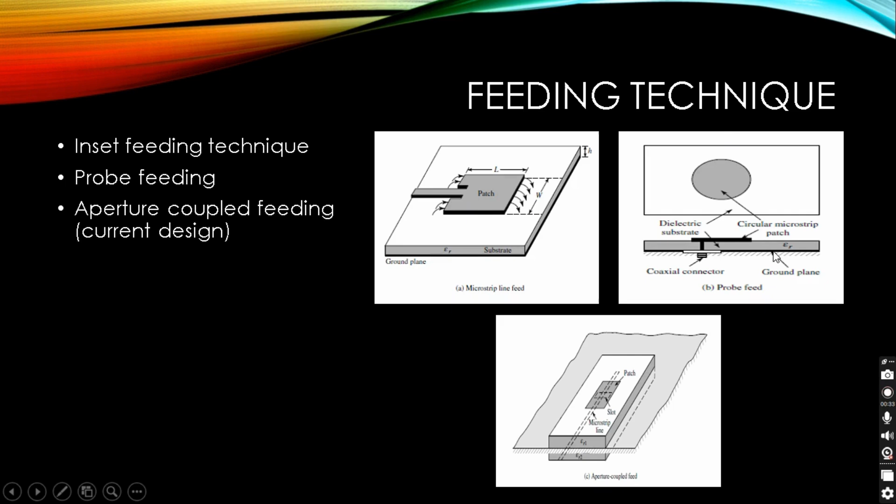Here are the various feeding techniques. The first one is an inset feeding technique. The second one is a probe feeding technique. The third one is an aperture coupled feeding technique. So what difference do they bring? Now these feeding techniques vary based on our requirement. It also defines the ease of modeling and fabrication and the required profile.

Now in an antenna, when we have designed an element, it might go into an array. The array may be linear, planar or phased array. So based on the requirement also, we choose the feeding techniques. And then comes the specification. The specifications might be stringent. I mean, we might need a very broad bandwidth, or sometimes it might be a narrow bandwidth patch antenna. And there are other antenna characteristics, such as cross pole. So, depending on the feeding technique, the cross pole might differ.

So, you can have a look at the various designs that I have demonstrated previously. The first one is the inset feed, where we have a strip line and we have an inset cutting in the patch. The second one is a coaxial probe feed, where the connector's copper conductor core will touch the patch. And here, the third one is the aperture coupled feeding technique, which we are going to see today.

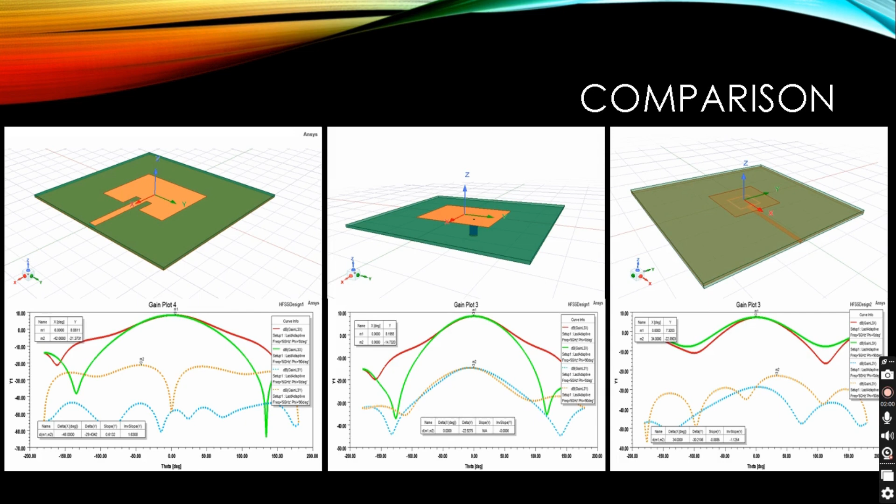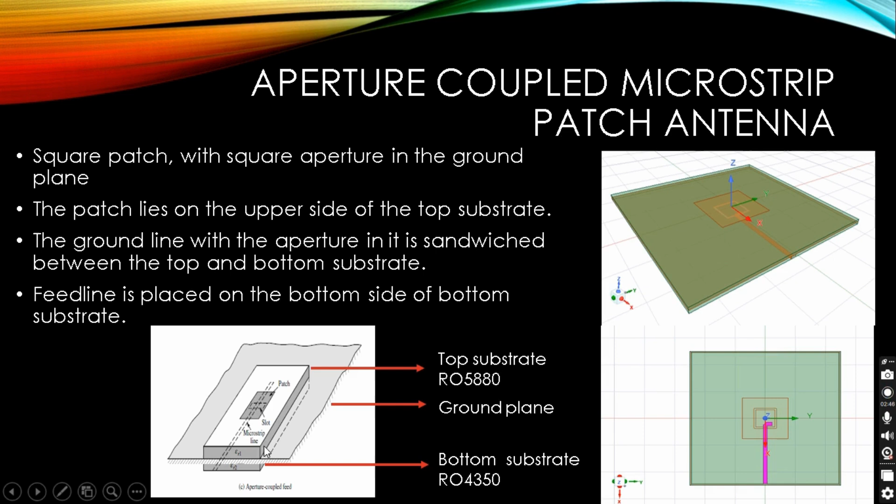So aperture coupled microstrip patch antenna, what is it? So today what we are going to design is a square patch, and it will have a square aperture in the ground plane. The design is unique in itself because here the ground plane will be sandwiched between two substrates. Like in this diagram you can see we have a top substrate and then we have a bottom substrate, and then the ground plane will be sandwiched in between these two, and in this ground we'll be having a slot or an aperture, square aperture, that will couple the RF signal from the feed line to the square patch.

Here is the basic calculation as done in the previous videos. In this video as well, we'll be designing a patch antenna which works at 5 GHz. So the free space wavelength will be 0.06 meter, and the guided wavelength, because I'm using Rogers 5880 material, will be 40 mm. The patch length typically we start designing from lambda g by 2, 20 mm, but we'll analyze the design and see at what length the exact results are coming.

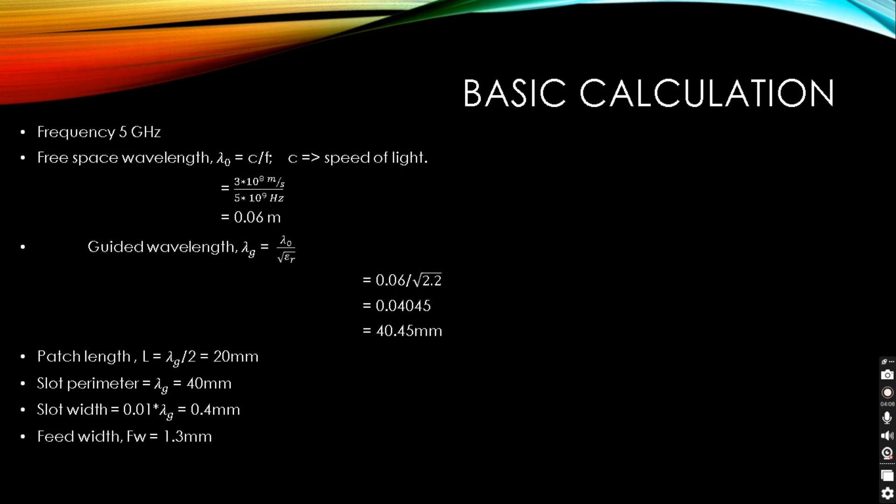The slot perimeter is around lambda g, and the slot width will be 0.01 lambda g, it is 0.4 mm, and the feed width is 1.3 mm. That is based on microstrip line calculation, microstrip of 50 ohm, depending on the substrate that we are using. Because we are using here 4350 material that has an epsilon r of 3.66. If we use the line calculator, 1.3 mm feed width will give us 50 ohm impedance. So let's get started with the design.

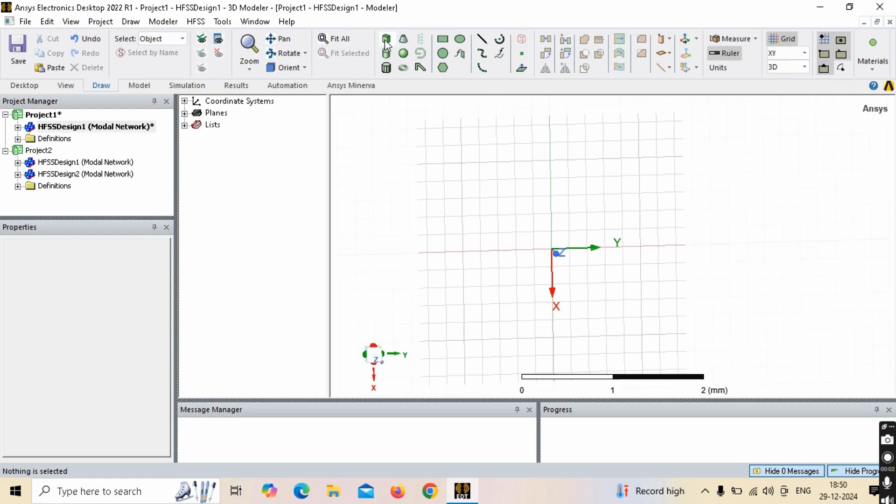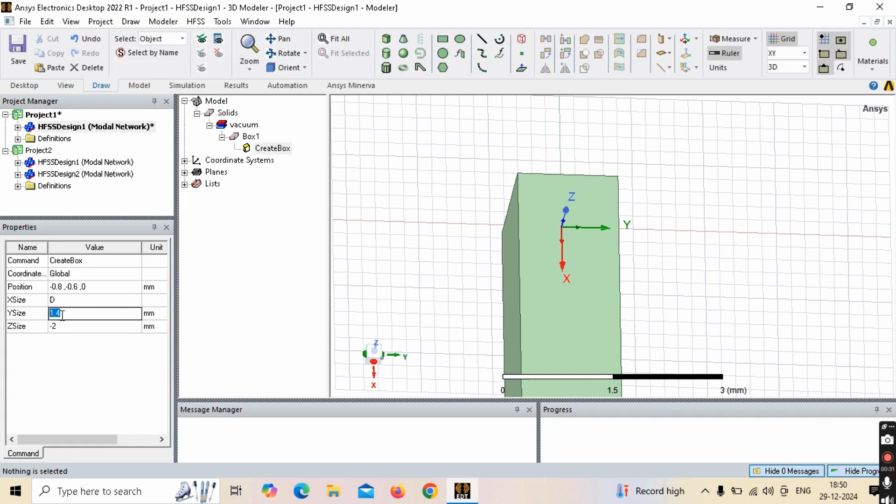This is the working plane in HFSS. We'll first design the antenna in HFSS and then do it in CST and compare the results. Let's draw the substrate first. We'll click on this draw box and drag our mouse. And then click on create box. Here we'll define our dimensions. Along X, I'll define D, take it to 50 mm. Similarly, along Y axis, I'll define it as D. And Z, my substrate thickness is 0.76 mm.

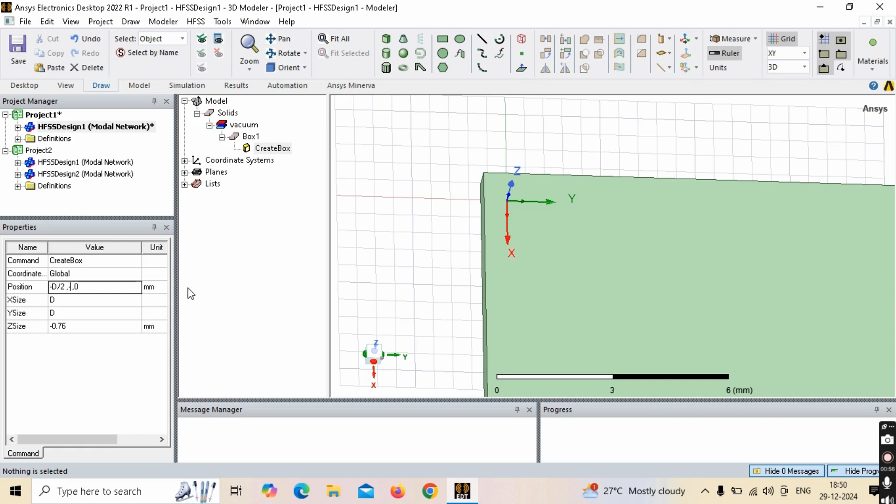And then position at the center. So along X, it should be minus D by 2. Similarly, along Y axis, it should be minus D by 2, and Z should be 0. So this is the substrate. My square patch will sit on top of this.

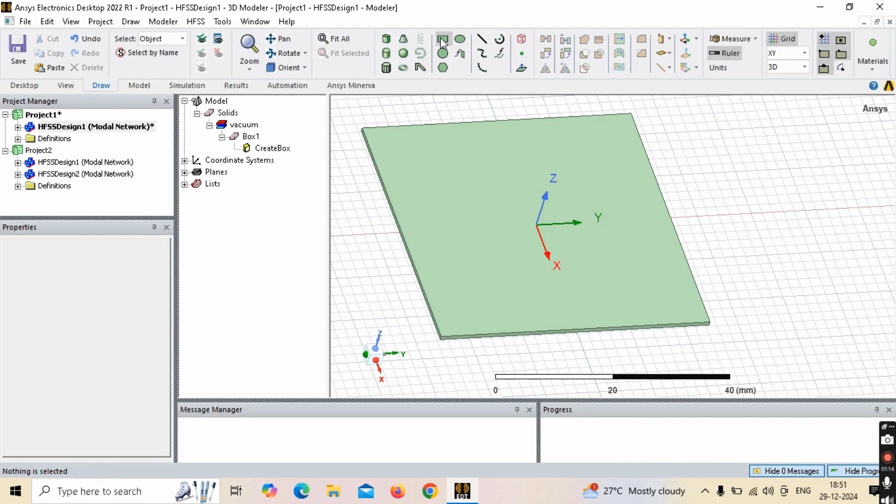So I'll select this draw rectangle and then click on create rectangle and set the dimensions. So since it is a square patch, both my X and Y axis will be same. Let us define it as L. We'll set it to 15.3 mm. Along Y axis should be L. Now let's position it at the origin. So along X axis it would be minus L by 2. Same for Y axis, it is minus L by 2. So my square patch is done.

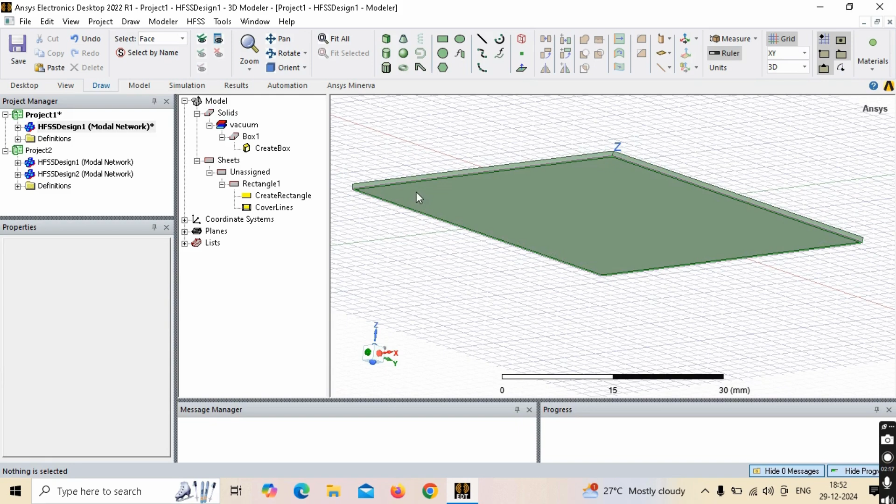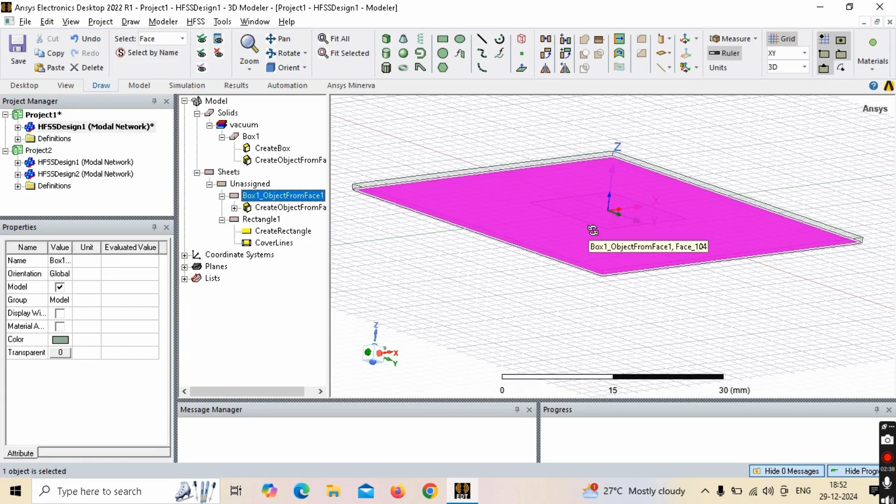Now I told you there will be one more substrate, but in between these two substrates I'll have my ground. So the ground plane will come in the bottom of this substrate. So I'll select face by pressing F and then click on this substrate and then right click, edit surface, create object from face. So I have got a sheet. This will act as my ground, but this ground will have an aperture. So I need to create another rectangle.

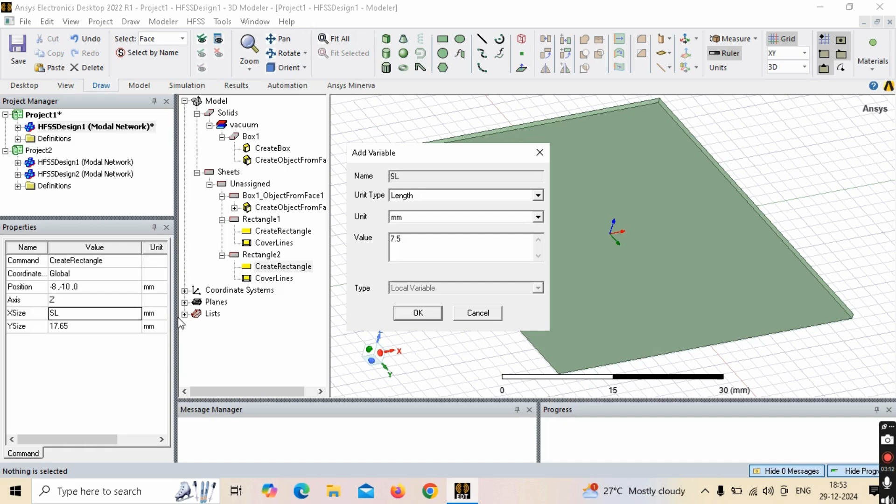I'll simply create the rectangle and then go into the create rectangle to set the dimensions. This slot length, I'll define the parameters as SL for slot length. The dimension will be 7.5, again slot length along y-axis.

Now let's position at the center. So for x-axis it will be minus slot length by 2. Similarly for y-axis it will be minus slot length by 2. And the position for z-axis, it has to be in the bottom of the substrate. So it will be positioned at minus 0.76. So now you can see my rectangle is properly placed at the bottom side of the substrate.

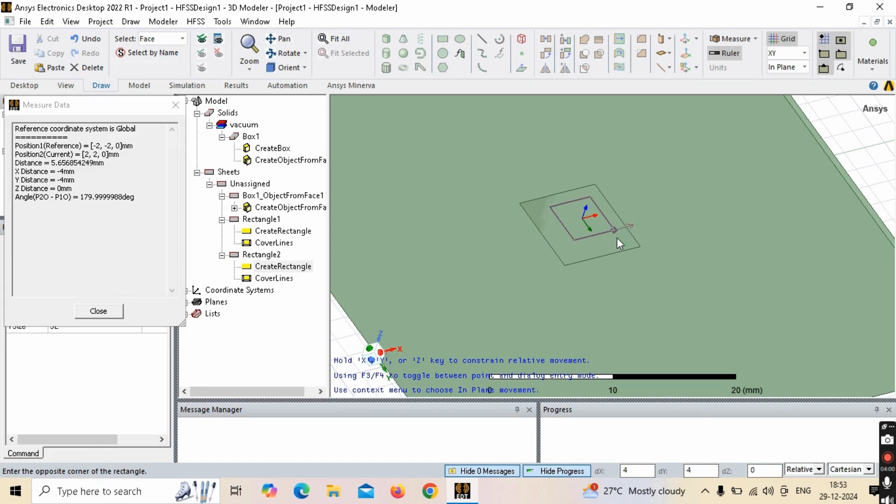Now I'll need one more rectangle. So again I'll click on the create rectangle and create any arbitrary rectangle. We'll define the values inside this create rectangle. The x size will be SL minus slot width. That means the size will be smaller by SW in x-axis. So the slot width is 1 mm.

Similarly, along y-axis, the size will be SL minus SW. That means in both x and y-axis, this rectangle will be smaller than the previous one. I'll show you why I'm doing this. Now let's position it at the center. So it should be minus SL minus SW by 2, and minus SL minus SW by 2. And along z-axis, it will be minus 0.76.

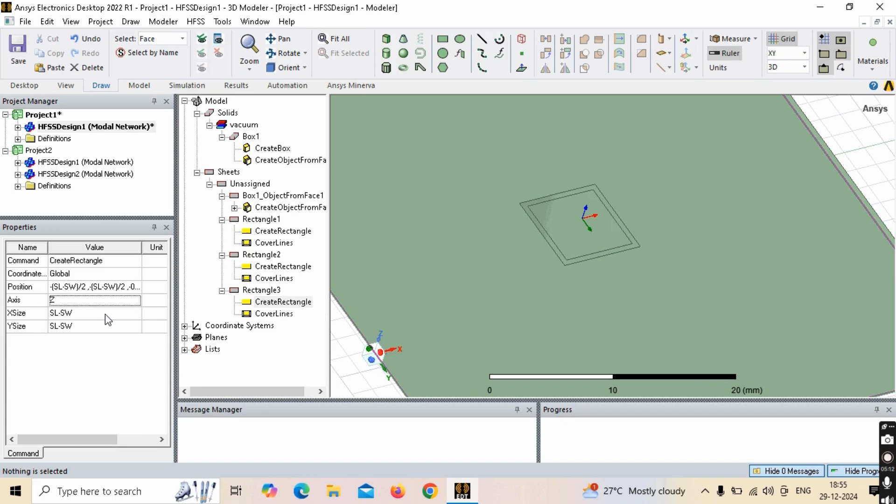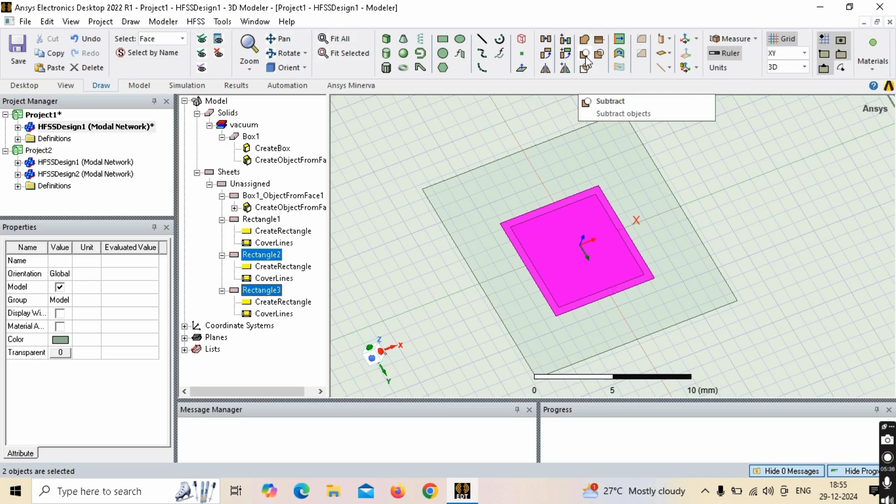So you see, here I have two rectangles. One is larger and the other is smaller compared to the previous one. So I need to subtract the smaller from the larger one. I'll click on this rectangle 2 and rectangle 3 as well and click on this subtract icon. So here I'll place the rectangle 2 on the blank part and the tool part will be the rectangle 3. Tool part means the part which I want to subtract out, and click OK.

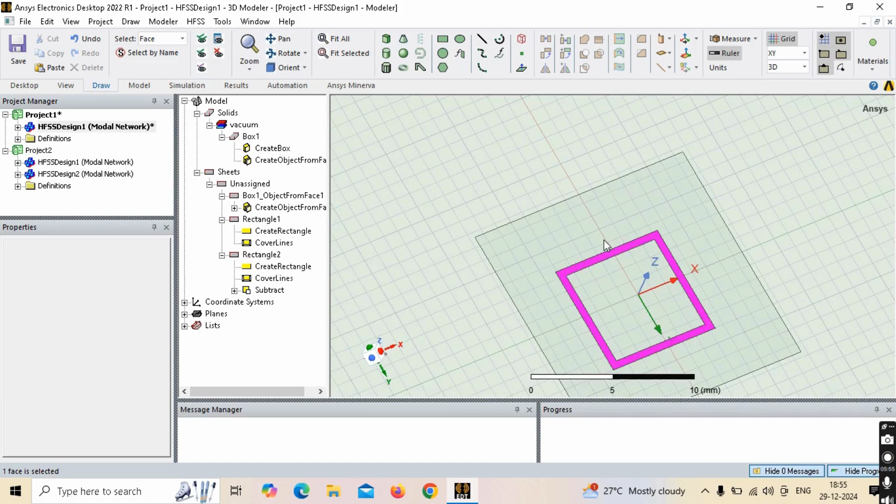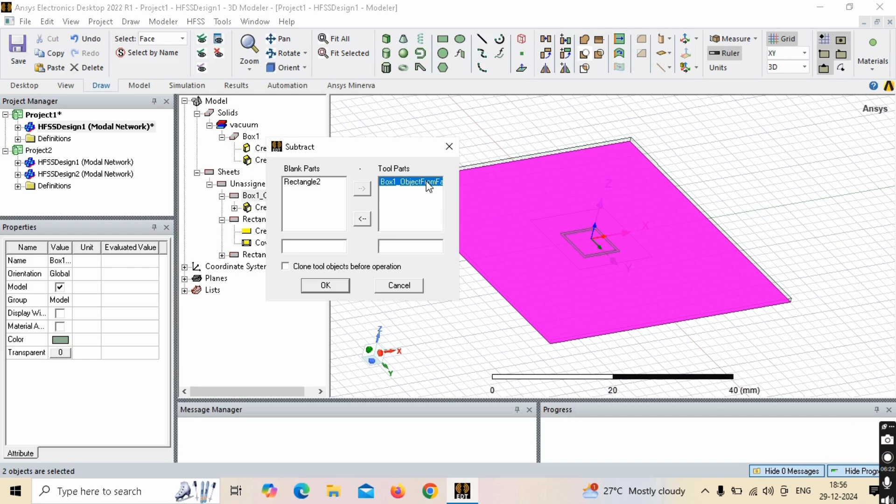So you can see I formed a loop, square loop. This actually is going to be the aperture in the ground plane. So I'll select the ground plane now, and the loop as well, and click on subtract. So what I want to do is I want to subtract the loop from the ground. So I'll move this box one over to the blank part and rectangle two to tool part, and then press OK. So now you can see here the ground plane is having an aperture in the shape of a square loop.

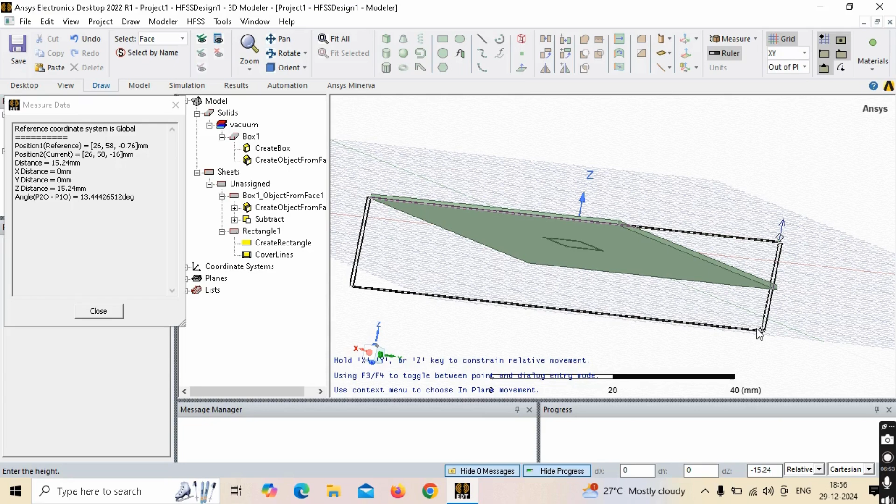Now I'll be drawing the second substrate. So I'll click on this draw box, just arbitrarily draw any rectangle. Go to this create box. Here I'll be putting in the dimensions. Along x-axis it would be d, same as y-axis. My z size is going to be 0.76 mm, but I need to position it properly.

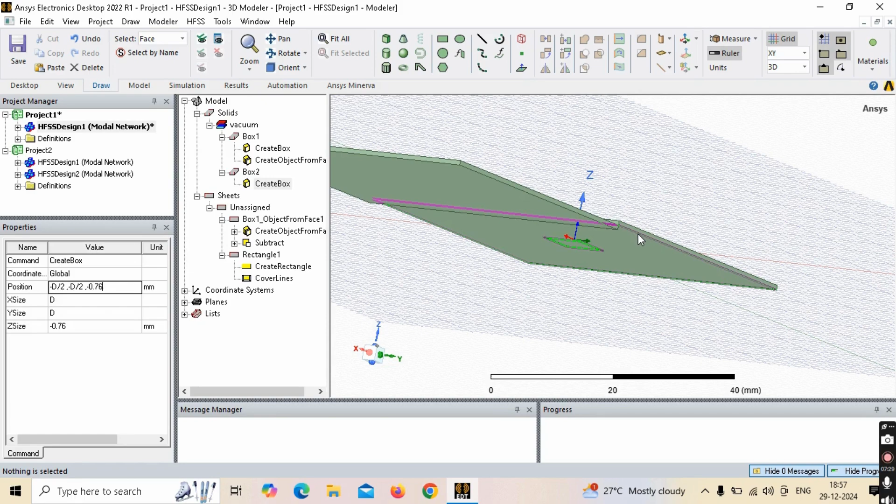I'll be assigning it at the origin, minus d by 2, minus d by 2. And in z-axis, I'll have to come down by 0.76 mm. So that is why I'm putting the position as minus 0.76. So the second substrate is positioned properly.

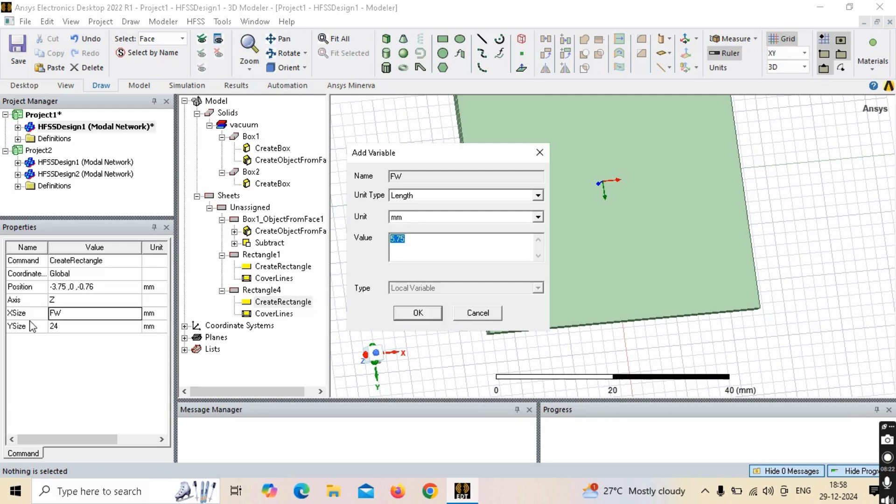Now finally we just have to draw the feed line that will come to the bottom of the bottom substrate. So I'll draw another rectangle and define the dimensions here. The x-axis, that means along this I'll be having the feed width. The feed width will be 1.3. Along y-axis, it has to go up to this edge, up to the edge. So it should be d by 2.

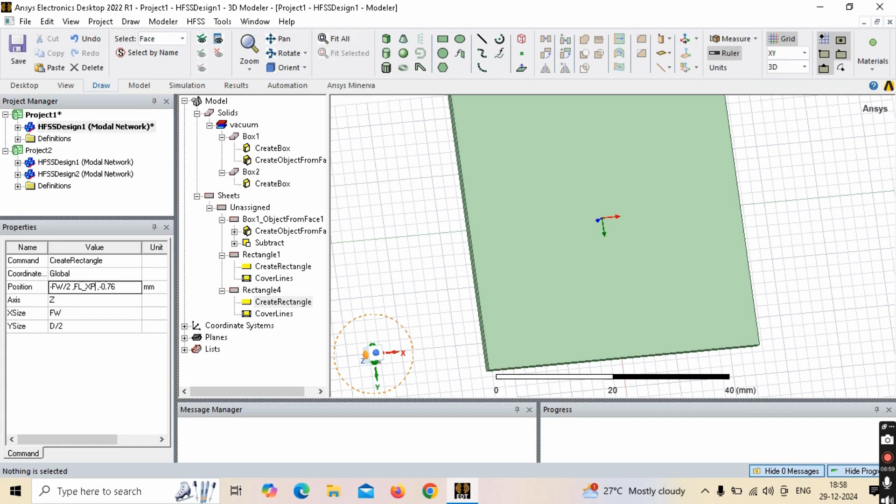Now I need to properly place it. The position for x-axis, it's going to be minus fw by 2. And along y-axis, I'll be defining a variable as, say, fl_xp. Let's make it 0 mm. We'll see why I put this extra variable.

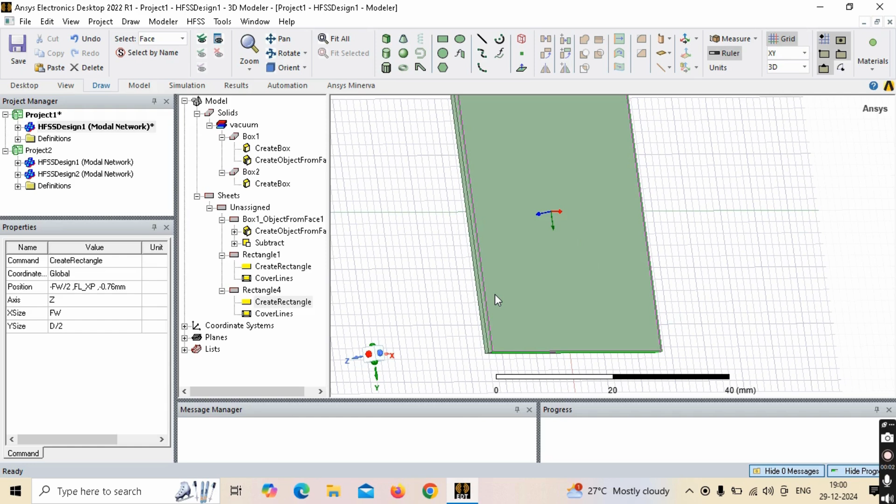Now let's position the feed line to the bottom of the bottom substrate. So it has to come down by 0.76 mm and again 0.76 mm. So it should be 2 times 0.76 mm along z axis. Let's check. Yeah. So why I introduced this FLXP? Because I need to have a control over this feed line along y-axis, length along y-axis.

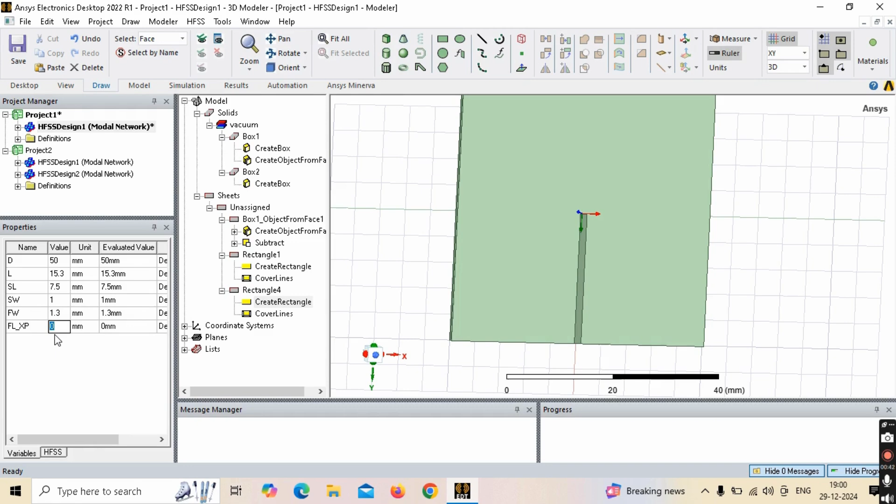Suppose I put this as 1 mm. You can see I can have an offset along y-axis, but this is coming downwards. Length is getting out of the substrate. So I need to reduce the size by FL_XP. So now you see I can have the offset from the origin, and the length is also not getting out of the edge of the substrate.

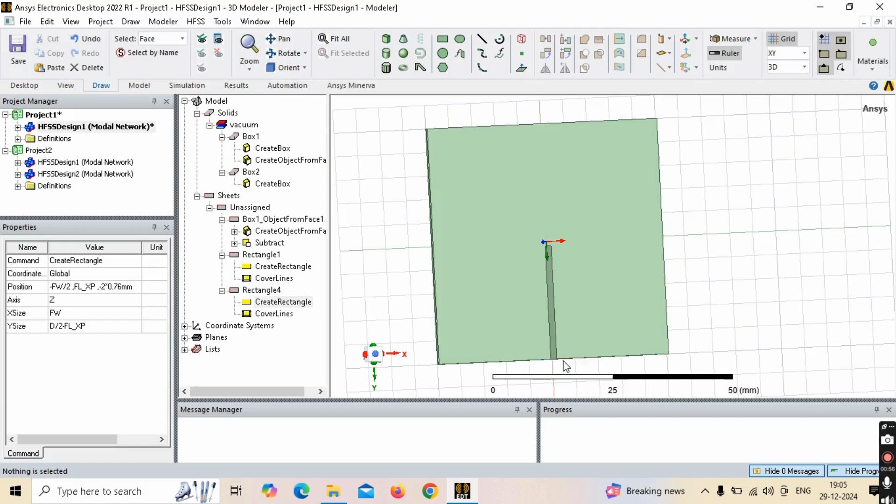For better visibility, we can actually make these substrates transparent. I'll check these two boxes and make them a little transparent so that the visibility is better. Yeah, here you can see. So FL_XP needs to be 1.5.

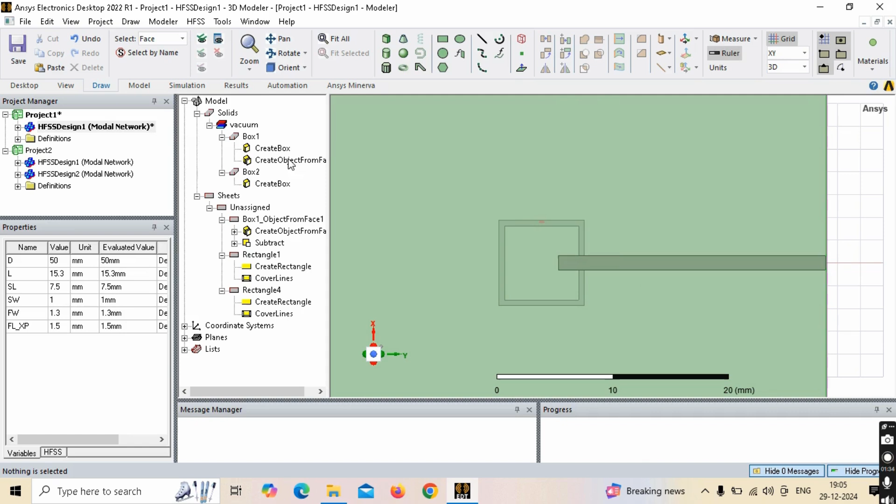And now there will be one more length that will come along x-axis. This is done for better matching. So I'll create another rectangle and put the dimensions over here. Along x, let's name it as FL1. It will be 3 mm. And along y-axis, do the feed width. Now let's position it properly.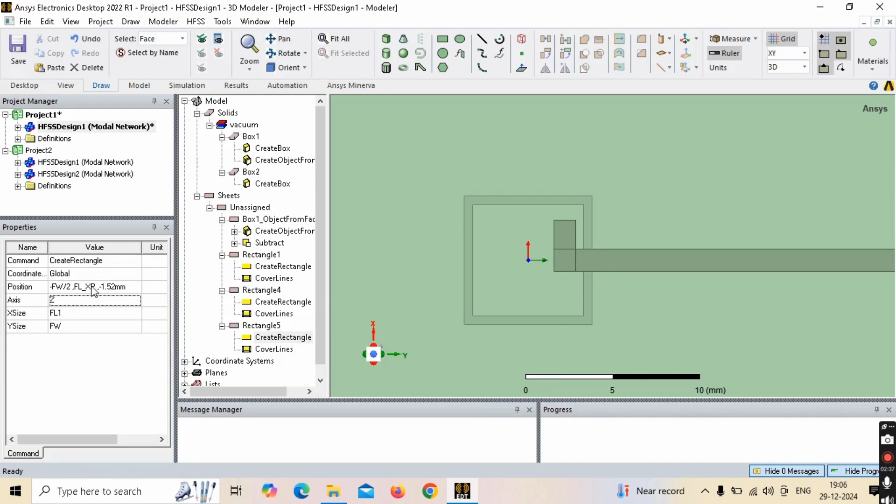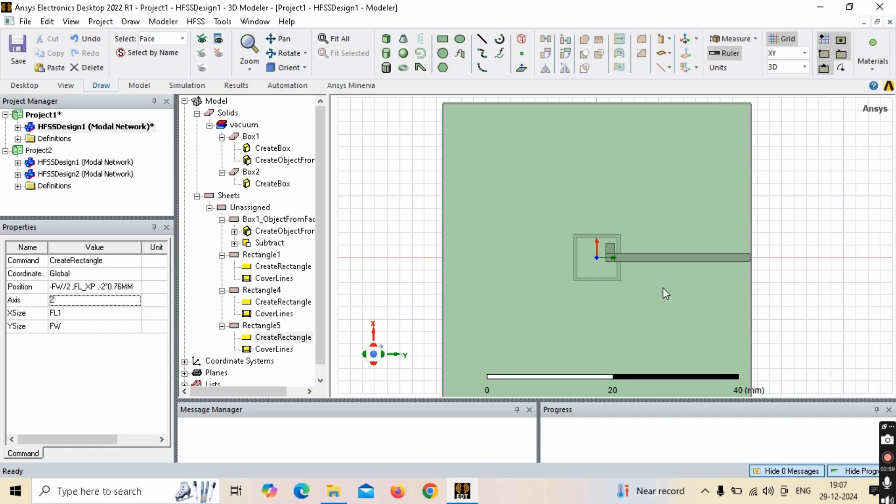I want the origin for this rectangle along x to be minus FW. Sorry, minus FW by 2. So it will start from here, from this edge. And I also want my y position to be FL_XP. Okay, so we are almost done with the designing of the feed line. And the z-axis, as previously said, it will be 2 times 0.76 mm. So we are done with the design of the feed line as well.

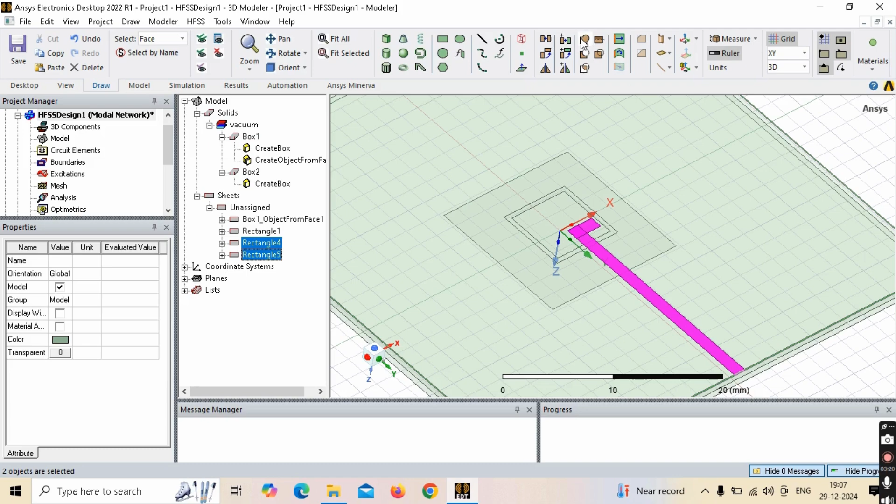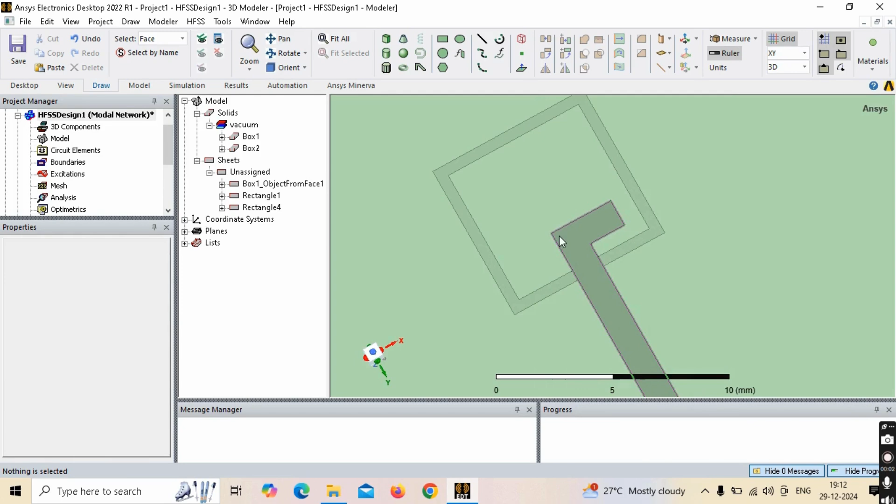Now let's unite these two rectangles. I'll select these two rectangles and click on unite. Usually, while designing, we should not have these 90-degree bendings. So now, while designing, if we encounter any such right angles, we should add a chamfer at this right angle. So in order to add this chamfer, we will need a 3D block. So I'll convert this sheet into a 3D block.

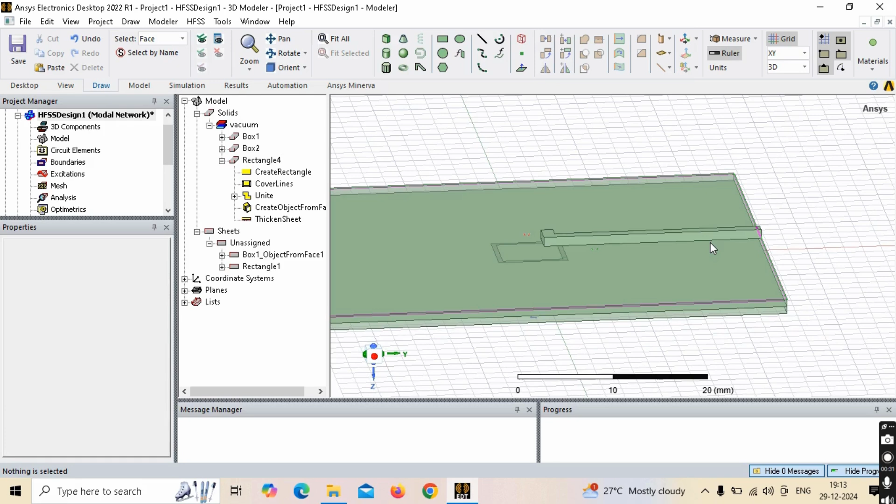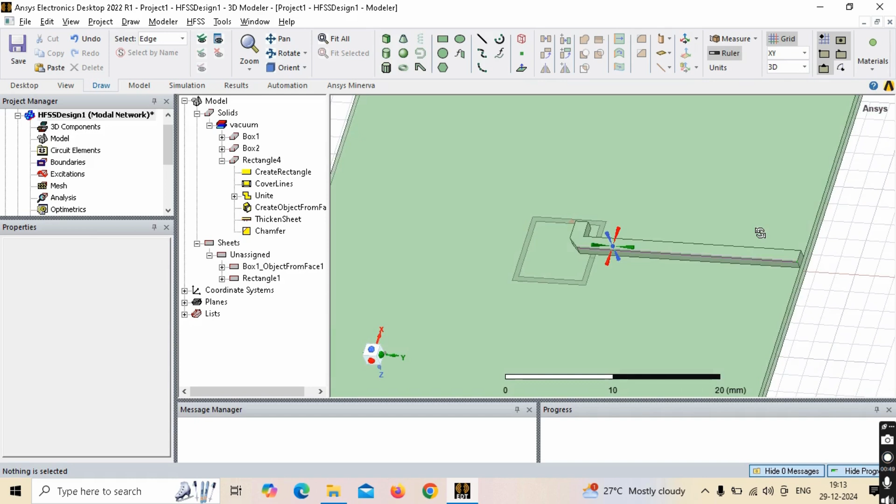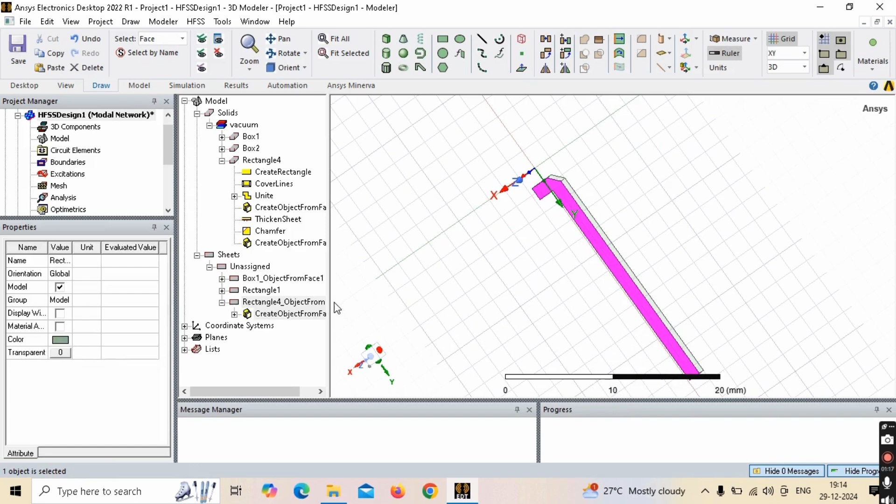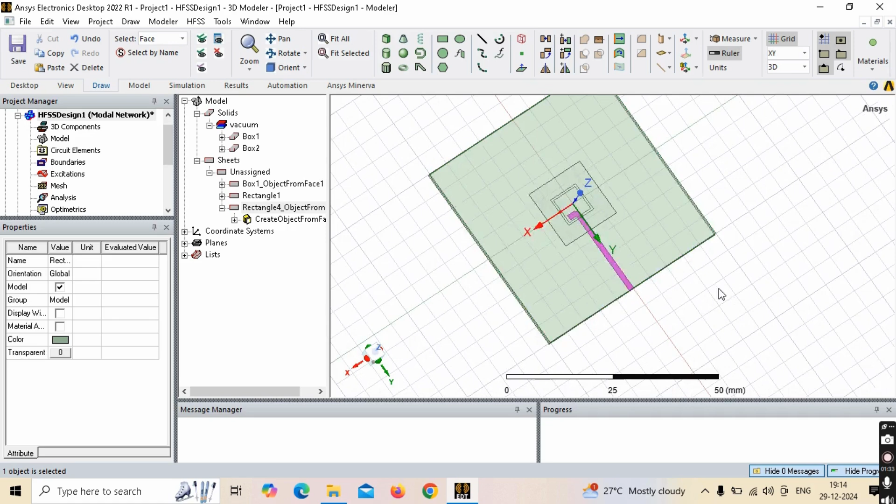So I'll select the surface, go to Modeler, surface, and create object from face. So here you can see this is a sheet that has been created out of this 3D block, and this is the 3D block. Now we can delete the 3D block, and we'll still be having the sheet. So we are done with the designing. Now we'll just assign the material, and the solution setup will be done now.

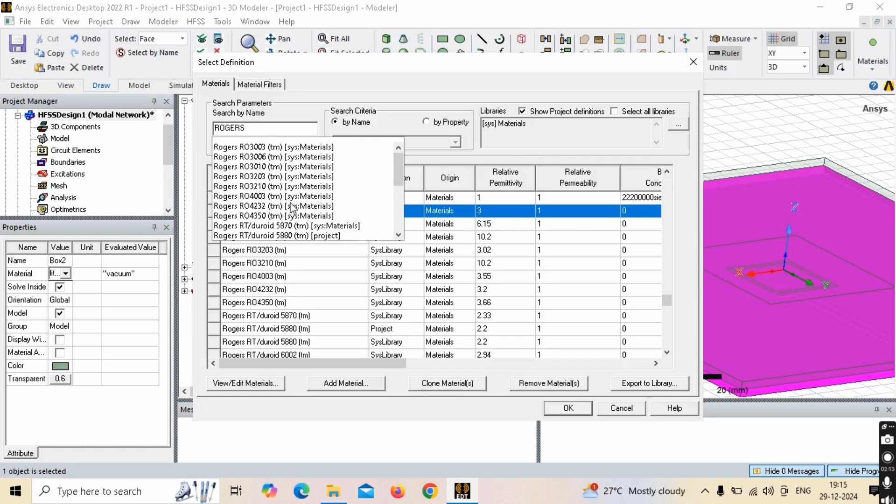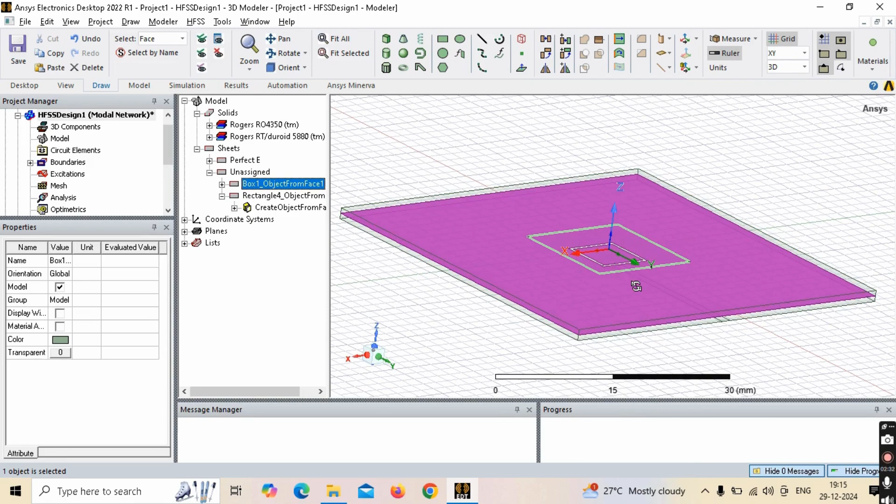So back in box 1, this is the top substrate. The material is going to be Rogers 5880. Okay, and the bottom substrate, it will be Rogers 4350. And then the patch, rectangle 1 is my patch. This patch has to be perfect electric. Similarly, my ground plane, I'll assign boundary to it as perfect electric. And finally, the feed line is also going to be perfect electric. So we are done with the feeding. We are done with the design.

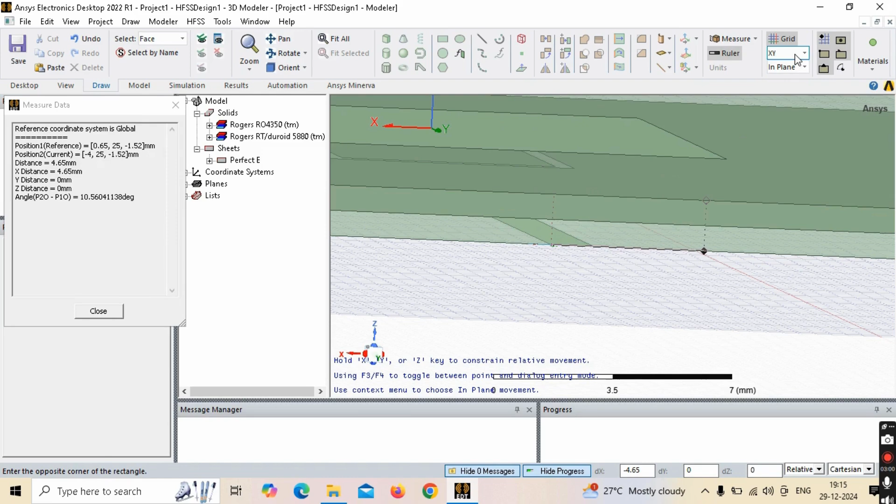Now I'll assign the excitation at this edge. So I'll create a small rectangle over here that touches the feed line as well as the ground plane. I'll mention the dimensions in here. Along X it should be FW, feed width, and the height from the feed line to the ground plane is 0.737. Let's position it properly. Along X-axis it should be minus FW by 2. Yeah, that's it.

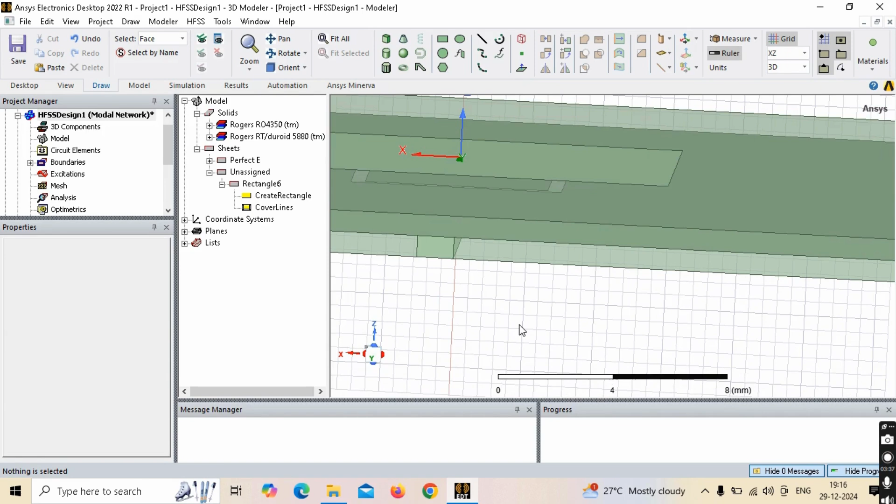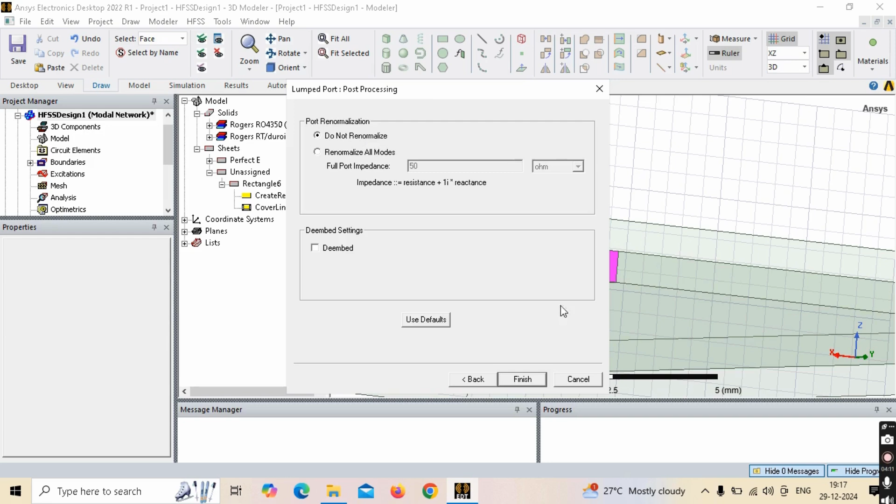So here I'll be applying the excitation. I'll click on this small rectangle and click on assign excitation, ports, lumped port, 50 ohm, integration line, and do not renormalize. Finish. Now we'll define the surrounding medium. In order to do so, we'll right click on the working plane and create open region. The operating frequency will be 5 GHz and it should be a radiation boundary. Press OK.

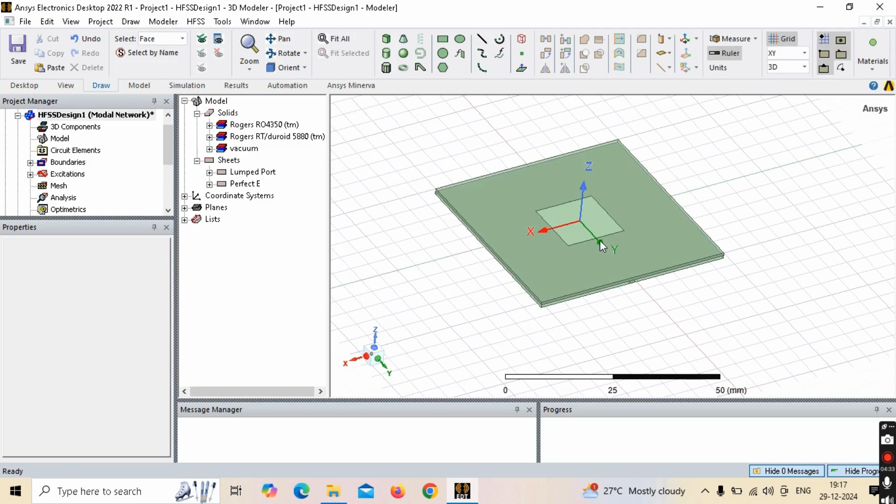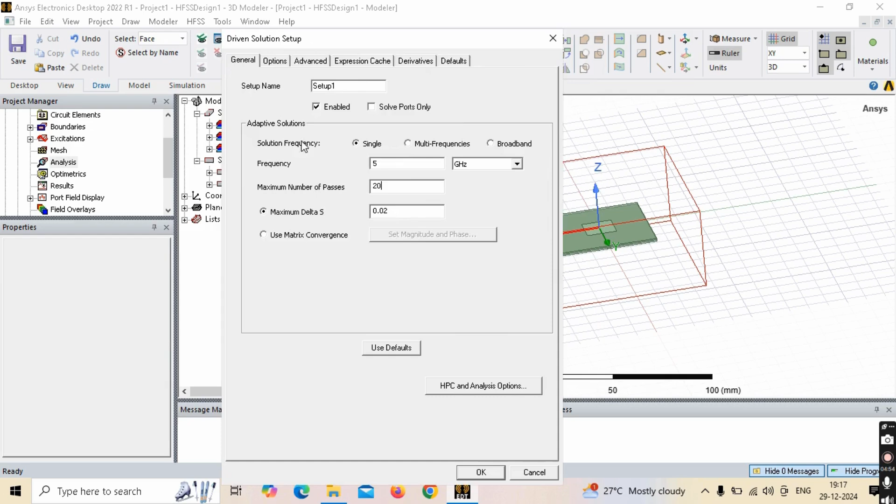Finally, we are going to set up the solution. Frequency is going to be 5. The maximum number of passes, I usually keep it 20, so that even if it takes more number of passes, there is no error. Fine, press OK. Add the sweep, since my antenna is radiating at 5 GHz, I'll keep the sweep between 4.9 to say 5.2 and press OK. Finally, let's save the design. Control S. Let's save it here.

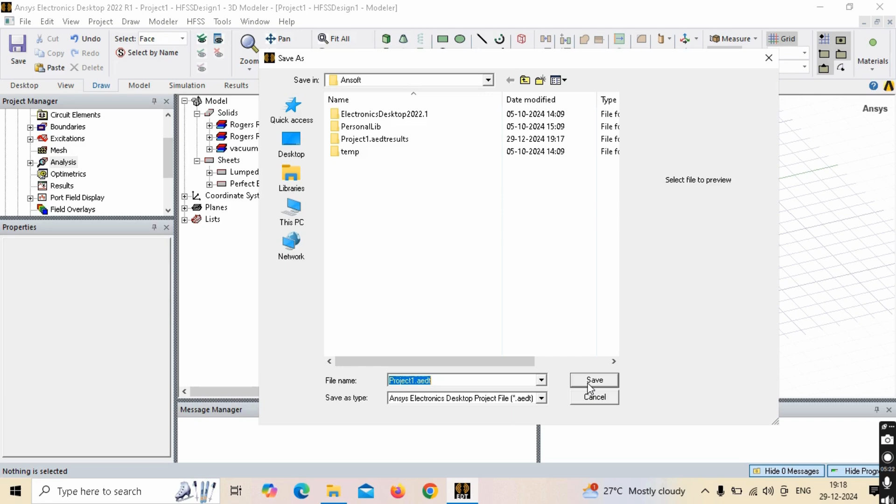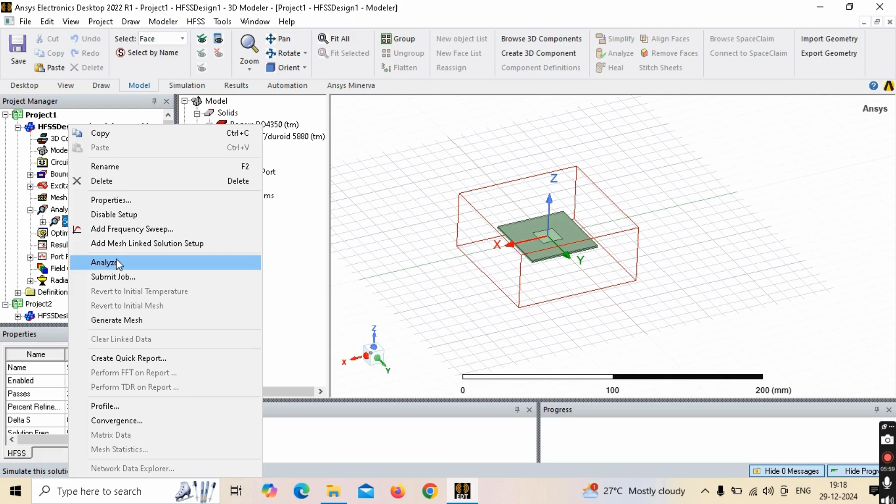So before setting the solution or before analyzing, we can check whether our design is perfect or if there is any error. So to do so, we can go to HFSS and validation check. So you can see everything is fine here. You can start the solution now. You can analyze it. So here is the same design which I have modeled previously. I will not analyze the same design again. I'll show you the results here.